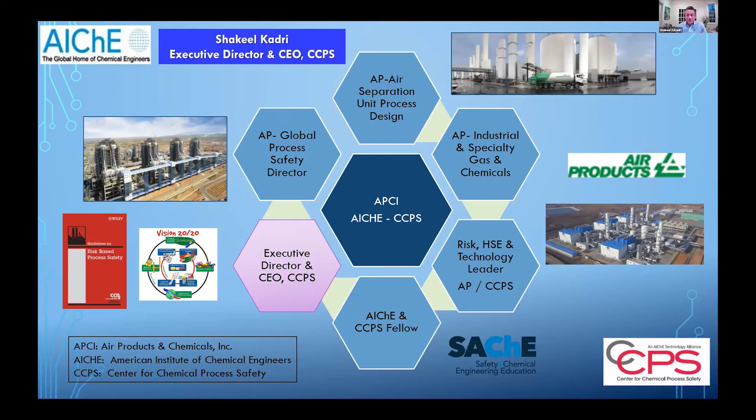And the task I'm talking about today, I could have used some help there. CCPS, I got involved with them many years ago, and I'm pleased that I have the opportunity now to leading this organization globally.

So let me start with a sober reminder. We all are aiming to reduce process safety incidents for many years, and I think we have done some improvement. There is more awareness around process safety globally. Actually, this conference is an example. However, we are still not making enough progress to eliminate significant process safety incidents. We need to continue to do such collaborative efforts.

I wanted to share one of that approach that my organization has been working for several years. But let me start with some of these reminders. CCPS actually started to catalog significant incidents beginning 2019, because our members really felt that it would be a good initiative to raise the sense of vulnerability.

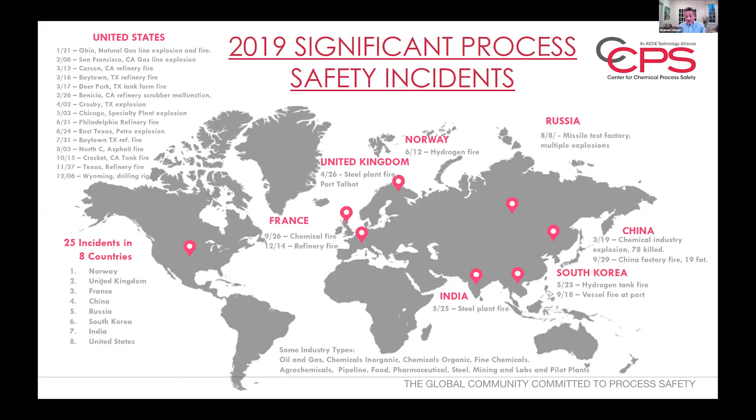I have included only about 25 incidents here. They are not all complete, but the idea was to recognize that. You may recognize some of them. The United States certainly had a major share of the major incidents. Actually, in China, I experienced a tragic incident killing 78 people in 2019. Of course, we also saw an entire refinery demolished in an incident, and that was in Philadelphia.

In 2020, we cataloged almost 64 incidents occurring in 19 countries, and I'm sure people had a lot more challenges to deal with because of the pandemic. India specifically experienced a significant number of incidents, and they had 32 major incidents claiming about 75 lives. We saw the styrene release in India that was reminiscent of the Bhopal incident of 1984. And this incident also killed several people and put hundreds in the hospital with breathing difficulty.

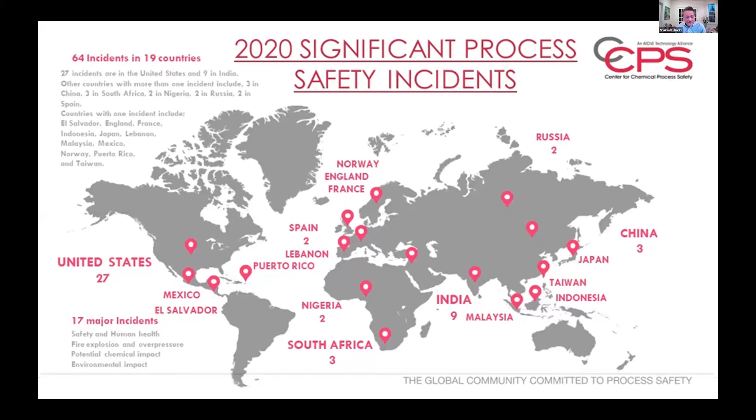We also experienced a horrific process safety incident, and people saw that in many videos around the world. This is the ammonium nitrate incident in Beirut, and at least 137 people were killed, and over 5,000 or so wounded in this massive explosion.

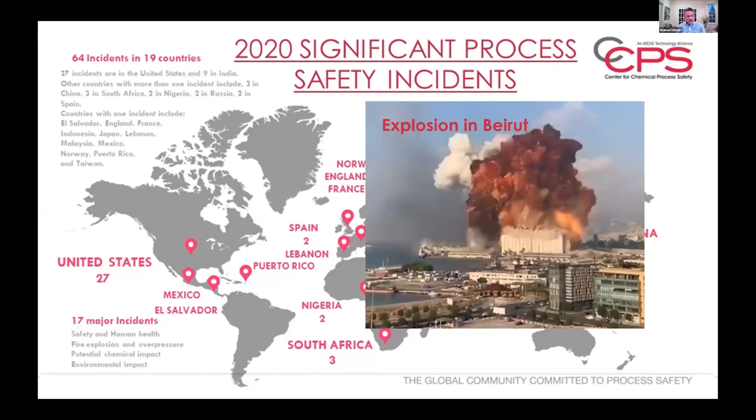I can go on and on that we really need to make some improvement. And then just yesterday, the Pertamina refinery fire—many of you probably already saw on YouTube that the incident happened. So my intention was to just again raise the sense of vulnerability and remind we all must have a desire and intent on process safety improvement.

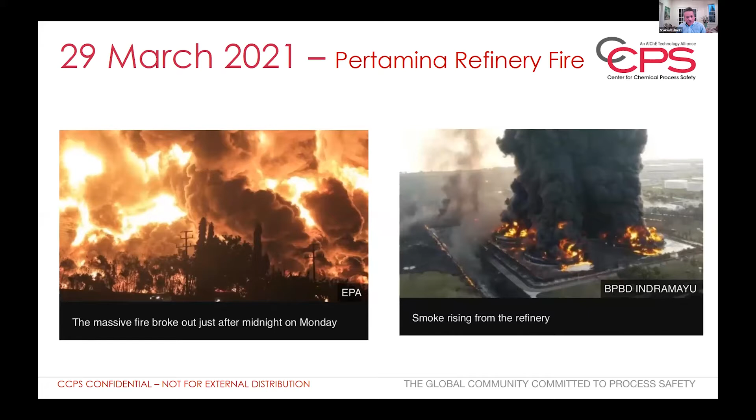So let me briefly talk about CCPS for those who are not familiar with the Center for Chemical Process Safety. It was formed on 23rd March 1985. It was industry's response to the Bhopal gas tragedy, really with the intent that we don't want to have this repeated incident in the future. It's a not-for-profit organization and is part of the American Institute of Chemical Engineers.

Corporately supported, it has a global scope and mission, focused on preventing process safety incidents, fire, explosion, and toxic releases. We really cover a diverse gamut of industry sectors, and we are headquartered in New York with offices around the world.

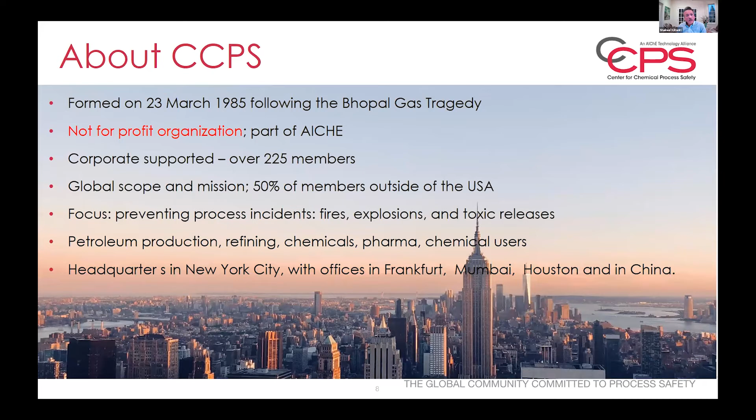So as of end of December, we closed the year with 227 members from 42 countries. About 50% of the members are located outside of the USA.

And I'm happy to inform that Jordan Engineers Association became a CCPS member in 2020. We are very pleased with their engagement, and extremely delighted that they have taken this type of initiative to collect and listen to the process safety stories.

Our membership is fairly diverse, includes large, medium, and small size companies in chemicals, petroleum, pharmaceuticals, metals, mining, non-manufacturing, consulting, industry associations like JEA, and government agencies. And the products and services developed and offered by CCPS are the result of the collaborative effort of these members. There's nobody sitting in the CCPS office writing all this. It's all done by the members.

So what is our vision? It's very simple: to protect people, property, and environment by bringing the best process safety knowledge and practices to industry, academia, the government, and the public around the world through collective wisdom, tools, training, and expertise.

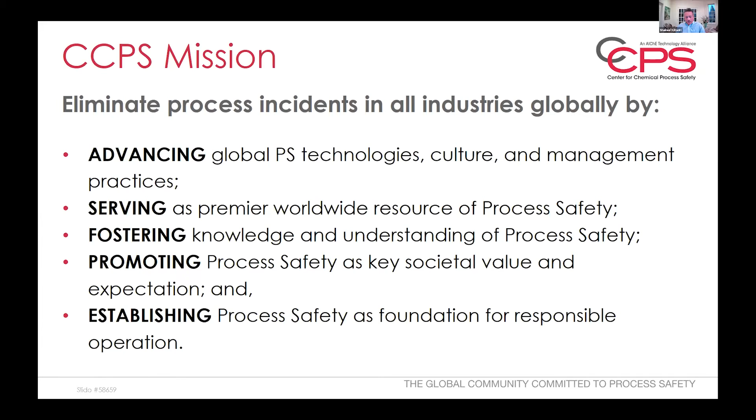So let me move to the topic at hand: what is the roadmap to process safety excellence? I strongly believe this roadmap will help leaders understand what they need to do in process safety management, help them assess how they are doing with their process safety management and identify gaps, and then provide them with resources so they can start the improvement process.

So this is really the big picture here. CCPS has been on this roadmap journey since 1985, since its inception. The effort I'm going to talk about is really from the last several years.

The three key components that are part of the roadmap are: one, the CCPS risk-based process safety guideline, developed and published in 2007; second, the risk-based process safety 20 elements that are part of this guideline; and the third is the CCPS Vision 2020.

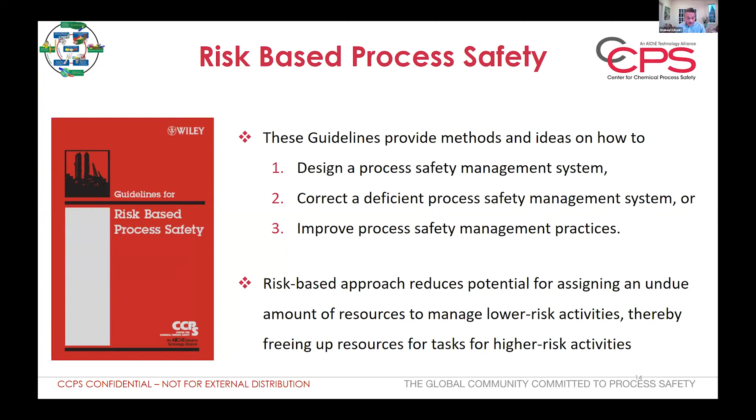And I'm glad to tell you these guidelines have been used around the world now. The key part of this guideline, or what I would call the foundations, are the 20 elements or the 4 pillars. I'm not going to go into detail with all the elements here, but let me briefly talk about the 4 pillars the whole book is developed on.

Leadership and commitment, a very important part of the pillar to process safety, is the key building block for pursuit of process safety excellence. Leaders who walk the talk will send a consistent message to do the right thing in the right way at the right times, even when no one is looking.

Understanding hazards and evaluating risk is necessary for an organization to know where to apply its limited resources to help ensure that accidents do not occur.

Managing risk involves a focus on operating and maintaining processes that pose the risk, controlling changes to those processes to avoid inadvertent risk increases, and preparing for responding to and managing incidents that do occur. And at the end, learning from incidents or experience, which we still have to do more.

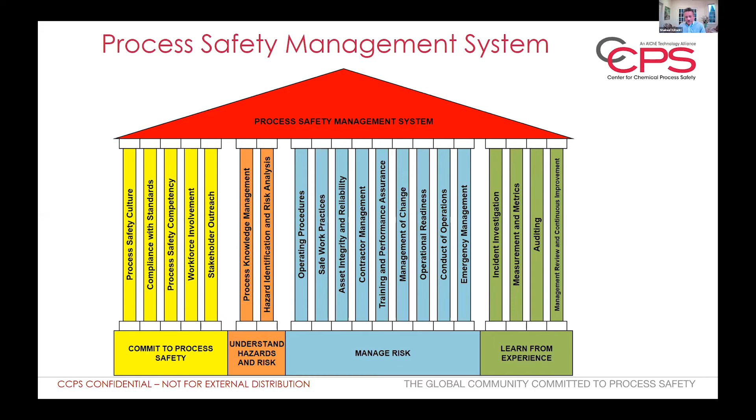This slide is the starting point of the protocols we are developing. It's developed on the 20 risk-based process safety elements.

Each assessment protocol looks at what are the key essential features of that element that must be achieved. It gives various work activities that demonstrate that you are implementing this feature and at what level. It provides an opportunity to rate yourself on this key requirement based on your implementation progress or KPIs. We have linked several resources with each protocol that will help the assessor identify an improvement plan to improve implementation of that element. These assessment protocols are being developed using input from multiple industry process safety leaders globally.

The scoring method is very simple. As you have seen, 'always' means there is evidence that activity occurs consistently. When it says any minor gaps are corrected by the established corporate management system, 'most of the time' means there is evidence that the activity is executed.

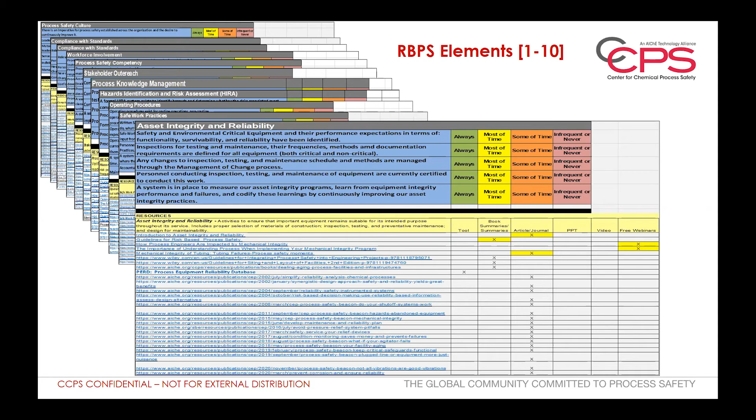Can you please mute? Thank you very much.

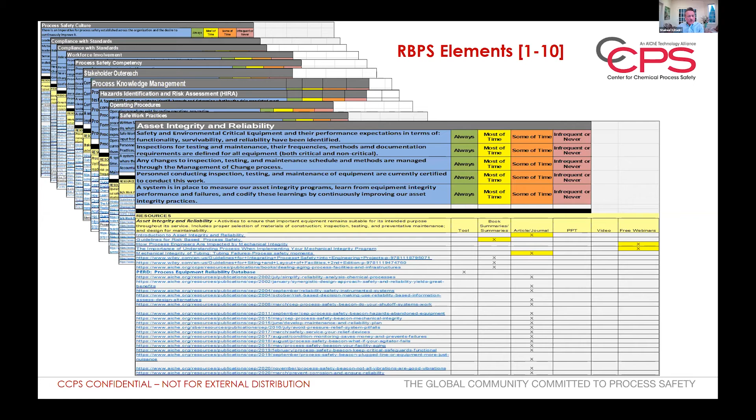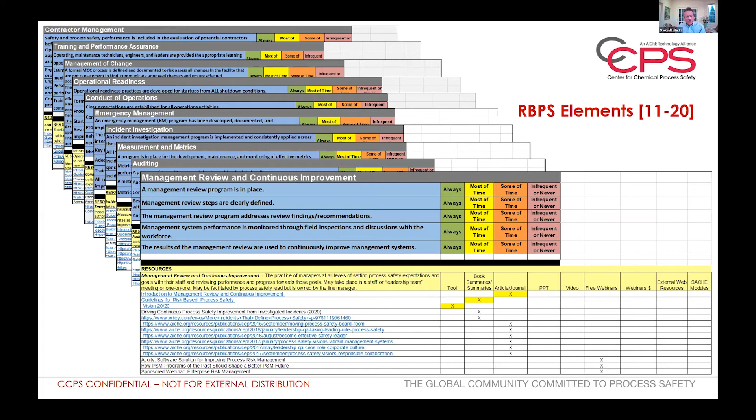And basically we took this approach for all 20 elements. This is the other 10 elements, and each element has similar detail. And you can see on the top what are the key requirements, and on the bottom what are the key resources available. So what do I mean by resources here?

Here I have included a selection of resources. First, the biggest resource we have is the publications we develop. Over 130 or so process safety guideline books have been published since the inception of CCPS. This is actually the largest resource of body of knowledge on process safety.

We have a variety of web tools like the chemical reactivity worksheet, golden rules, process safety incident database, specific process safety videos, and so forth. And of course, we have nearly 20 years' worth of process safety beacons. Most of you are aware of that.

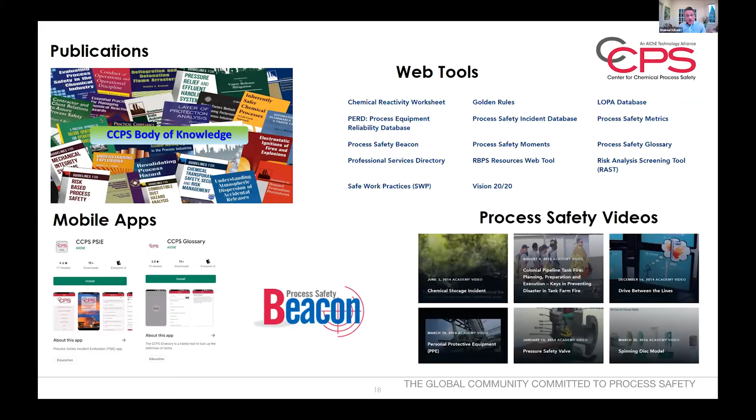Along with those resources, we also link a lot of our process safety training for professionals, for undergraduate education, for faculty members, and so forth is included as part of this, and also many of the trainings developed for individual components. So these are really kind of the sources we have.

So this is for individual process safety element improvement. But the question always comes as, okay, so I'm improving based on this guideline, how well am I doing compared with the industry? And this is the same question we asked almost about 10 years ago.

As a background, since 1985, CCPS has been collaborating with its stakeholders. In 2011, CCPS started to think about how can we significantly improve our process safety performance. And that's where the project called Vision 2020 came about.

So what is this project? In this project, participants worked hard to envision the process safety future and ask what will be the characteristics of the companies with great process safety performance in the future. What will distinguish the companies with fewer process safety incidents from those with more process safety incidents?

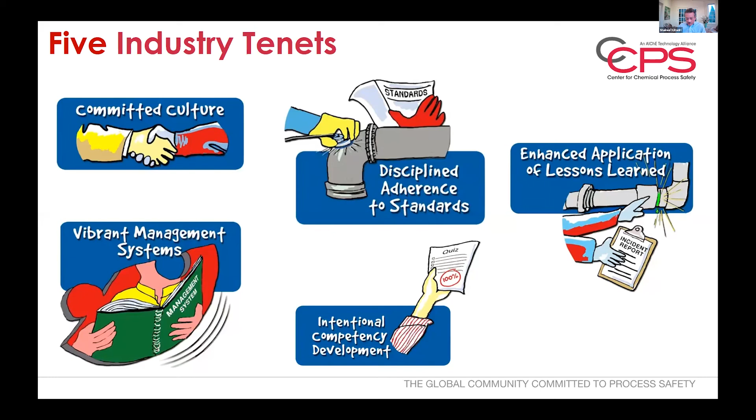Again, we developed a similar assessment tool for the 5 industry tenets. It helps companies assess their current implementation against Vision 2020 elements. So what we're trying to do here is, once you do your internal look, start looking at the external view and compare that - that's really where you'd achieve better performance.

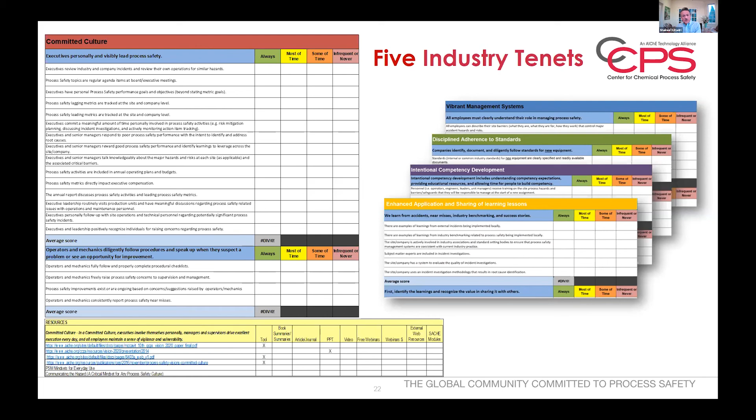The next is societal themes. First one is enhanced stakeholder knowledge, which allows the public to effectively challenge industry to prevent process safety incidents. And the same holds true for industry challenging the public to understand process safety risk.

Responsible collaboration, a very important part of this whole effort, means technical, government, labor, community, scientific, academic, and industry organizations are working together. When I talk about responsible, it has to be a two-way door here. Since standards can come from many sources, they can be confusing and conflicting. Harmonized standards provide consistent guidance for design, operation, and maintenance to support effective understanding of process safety risks.

Finally, companies use various assessment techniques to ensure their process safety management systems are working as intended. Third parties, including public and non-government organizations, evaluate implementation of process safety programs. And we created an assessment tool for these four societal themes.